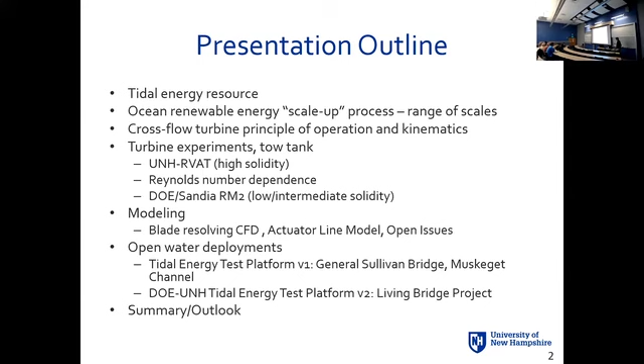At some point I may have to gloss over some things and move on, but overall my intent is to give you a good idea of the range of tidal energy research we have been doing over the past few years. So here's what I'll go through: I'll briefly talk about the overall tidal energy resource in the US, the scale-up process in ocean renewable energy development, cross-flow turbines, some tow tank experiments we've done right outside here, some modeling, and then mostly a picture show with data from our open water deployments. We have a couple of those.

Okay, so that's a complicated slide. I gave a presentation at Ocean Discovery Day - this is much better, I think. Shows a very big sun.

So wind energy is once-recycled solar energy. Wave energy is twice-recycled solar energy, and then tidal energy is two-thirds lunar and one-third solar energy. So tidal energy is actually a fairly small part, or could be at best a very small part, of our electric energy portfolio. Most of the resource is located in Alaska, actually, so that's not good for us at least. But we have some niche applications where this might work quite well - certain estuaries, inlets, and bridges. We'll explore those a bit more later.

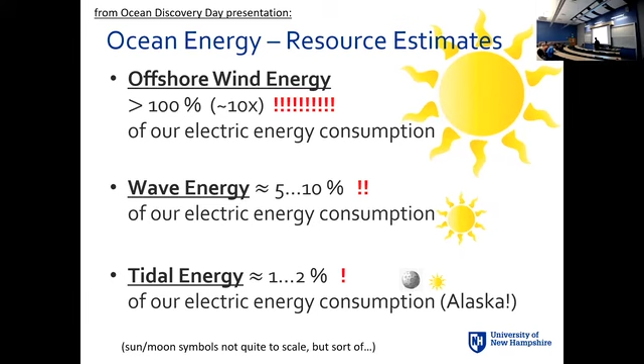So keep this in mind. That's really a massive part of the answer - that's a smaller part, wave energy, and that's very hard to do, we're still struggling with that. Tidal energy is a bit easier to do, a bit more obvious how it can be done, but it could at most be a very small part of the solution.

So in ocean renewable energy R&D, you work with theory, experiments, simulations, and then go through what we call a scale-up process. You start small, inexpensive, and then you grow it. You hope that before you move to the next technology readiness level, your answers from theory, models, and experiments somewhat agree, or that you understand why they don't agree before spending more money. At some point you have to go into open water, still a scale deployment typically. The first time you go into open water, you're still working at maybe a 1/10 to 1/3 scale, but that's how you work through this in order to not waste money.

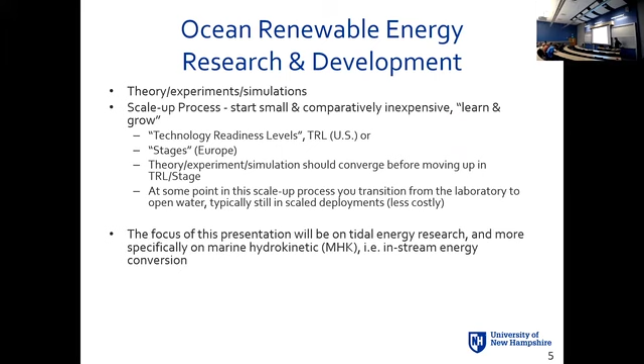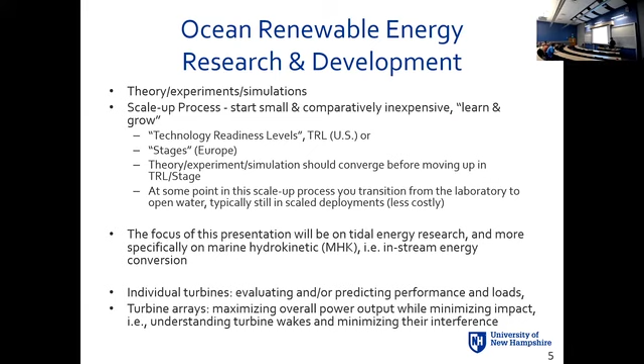So the focus of this presentation is on tidal energy, specifically in-stream hydrokinetic energy conversion, also referred to as marine hydrokinetic energy conversion, MHK. Here we're doing two things: looking at single turbines, mostly interested in performance, and looking ahead at array deployment - wakes and how these wakes decay and possibly interact. So performance and wakes are the two focus points of this study.

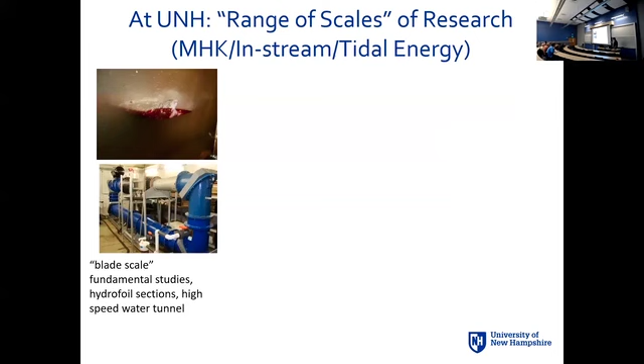Range of scales: we work from the blade scale, meaning we literally take little blade sections and evaluate lift, drag, cavitation characteristics in a small cavitation tunnel. Then we go to the tow tank, about a quarter meter or so, scale of a meter. Then we go into open water where we can work from say 1 meter to 4 meter. It's pretty crazy as a university to actually get into this 3-4 meter scale already - that's very large. Full scale, say a full scale 1 megawatt unit, might be as big as 16 to 20 meters, depending on the resource.

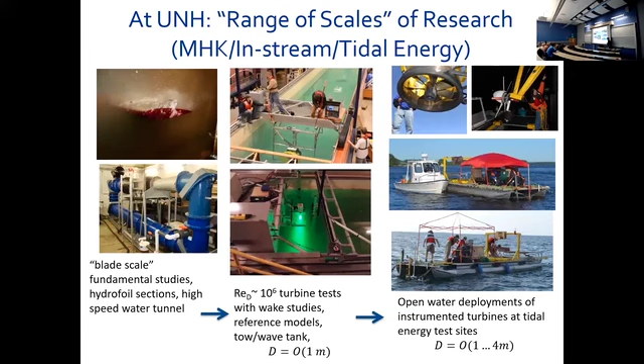They had to downrate it. This is when horizontal axis wind turbines were playing in the 500 kilowatt range, so these were much bigger at the time. They had to downrate the device because they didn't quite understand the unsteady loading that well. There were fatigue issues, and after 5 years it was shut down entirely. It's still standing, sort of a monument to the early successes and failures of these turbines.

There were fatigue issues. They were typically exaggerated with the power ratings. Actually, California made a mistake back in the early days of wind, paying developers based on rated capacity, not on energy delivered. So everybody was overrating their devices, and turbines had very low capacity factors.

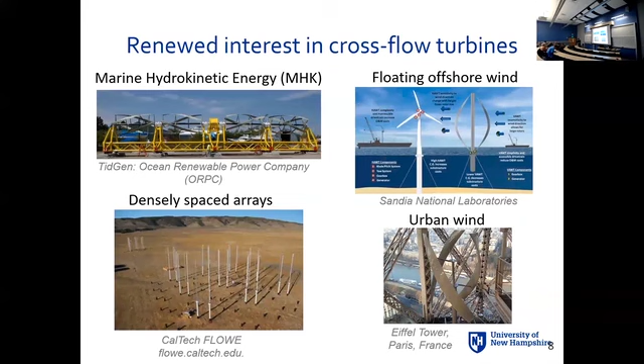So there's renewed interest in the marine environment, both for MHK applications and floating offshore wind, and then some other applications in terms of densely spaced arrays and urban wind. Cross-flow devices are quite promising in dense arrays because their wakes decay very quickly, and people don't really know why that is. They're also simpler machinery.

They're more complicated from a fluids perspective because they're unsteady devices - we'll talk about this in a moment. But they rotate in the same direction no matter where the flow is coming from, as long as that flow is approximately perpendicular to the axis of rotation. So you don't have to change things around. You put the thing in, it just runs.

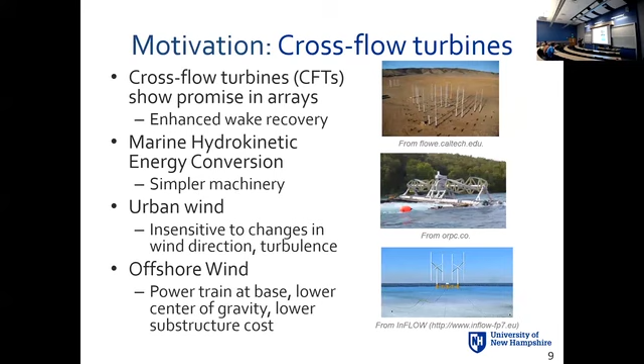And for offshore wind, you could possibly put the power train at the base of the device, which would make for much less need for balancing ballast below, compared to having a heavy power train on top of the nacelle. All right, so we have to have a little vector diagram.

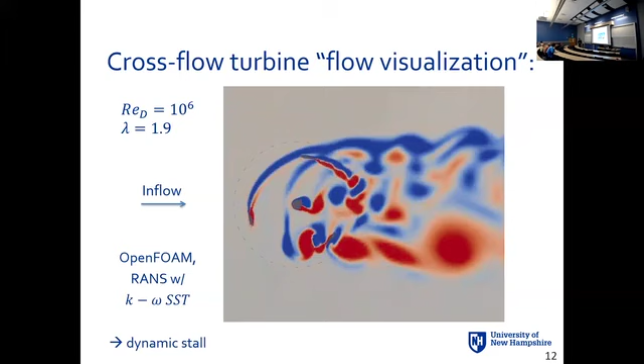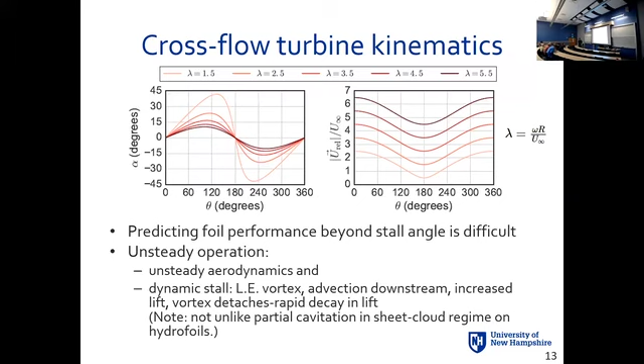You're dealing with unsteady hydro or aerodynamics, and there are a lot of similarities to rotorcraft flows. Some of the codes we use actually come from the rotorcraft industry. We have blades moving into the flow, blades moving out of the flow, that sort of thing.

So what do we have in terms of engineering tools? Well, we can do experiments, but if you go to large scale, experiments get very expensive. You don't want to play with large arrays and try to build like 10, 15 models at a large scale. We want to do this numerically.

For numerical tools, we have a range of models with increasing fidelity. We have very simple momentum or vortex line models, panel methods, then full Navier-Stokes simulations, either Reynolds averaged Navier-Stokes or large eddy simulations. And the actuator line model is sort of a method where you can reduce required resolution but still embed this into a full Navier-Stokes simulation.

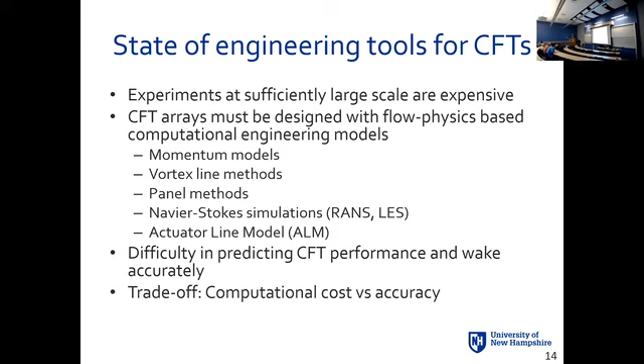There's been real difficulty predicting performance in a cost-effective way for these devices because they're unsteady. People have been struggling with this. The clear trade-off here is computational cost versus accuracy. We'll talk about the cost in a moment, how much time it actually takes to simulate these, and then how we can reduce them.

We want to understand performance better, improve performance modeling, and also understand wake recovery so we can put these in arrays. So what we've done is we've done experiments in the lab using the tow tank. You may have seen that turbine test bed standing on the side as you walk through the lab.

It's the funny hydrofoil frame with the black three-bladed turbine in it. We did some CFD to look at different classes of models. We did some blade resolved simulations and then developed this actuator line model compared to the blade resolved simulations.

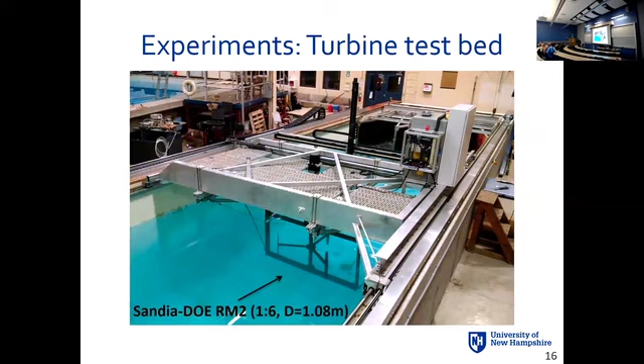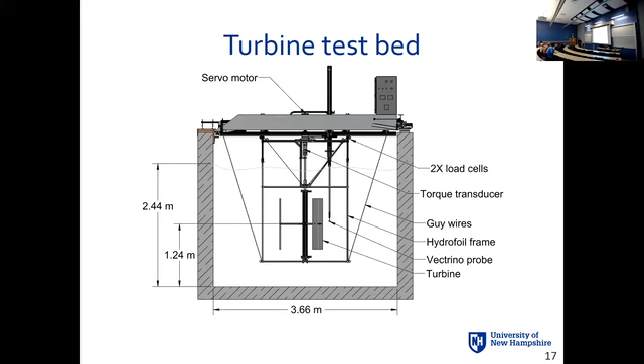We have load cells on this whole frame to get overall thrust on the system. We can tow it without a turbine to get a tare thrust and then subtract that to get turbine thrust. We can also do wake measurements with the Vectrino probe here, towing a separate carriage behind the main carriage. Here's a 4-prong lab version of a Vectrino that can measure 3 components of velocity at 200 hertz.

To get good signal to noise, we have to actually seed the towing tank with hollow glass spheres, which tend to clog up the filters. So, anyway.

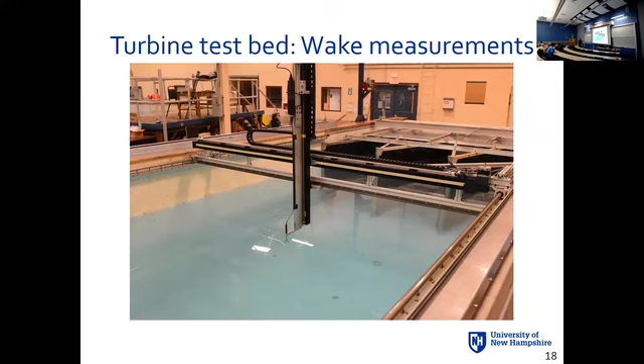A PhD student who was here until a couple of years ago, Pete Bachant, renovated the whole tow mechanism and this whole test bed, and he automated everything. Prior to this, we could do maybe tens of tows, and then we could literally do thousands of tows. Some of you may recall seeing Pete sitting there. It took him like a year to prepare an experiment, to get everything automated, but then he would just sit there for like 3 weeks doing nothing, just watching the thing go back and forth, watching his pre-made plots populate automatically, which is kind of a beauty to see.

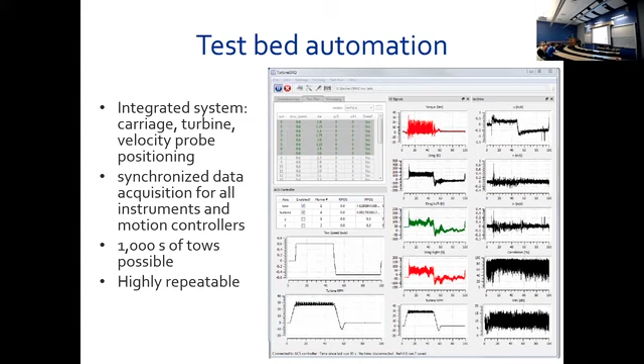So that's a typical towing profile. You can see the turbine RPM, torque, drag on both load cells, and then the different velocity measurements. That should play, yeah. So we actually spin the turbine.

The tank is really short. If I could change one thing about the tow tank, I would blow out the back of the building and make it like 5 times longer. But that's probably not going to happen.

So depending on the tow speed and tip speed ratio, we get about 10 to 20 steady state or quasi-steady state rotations over which we average. We do this over and over again, waiting a few minutes between each tow for the tank to settle down, and so forth.

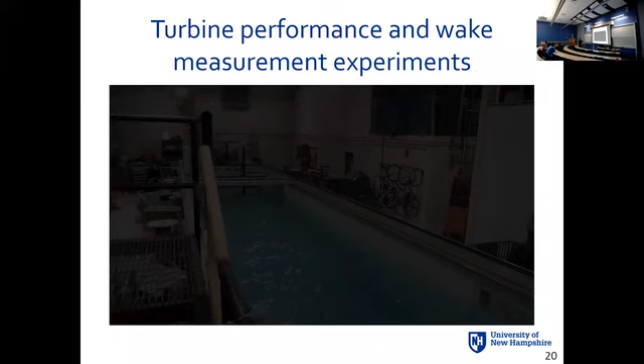So we want to talk about only 2 turbines. We tested a number of them, but these are the two we have most of the data for. It's what we call the UNH reference vertical axis turbine, a high solidity turbine which we built from these NACA 0020 hydrofoils that we had. They're pretty, not cheap to make. We had a whole bunch given to us by a company who went out of business doing this kind of work, so I'm quite happy to have lots of these laying around. It's a meter by meter.

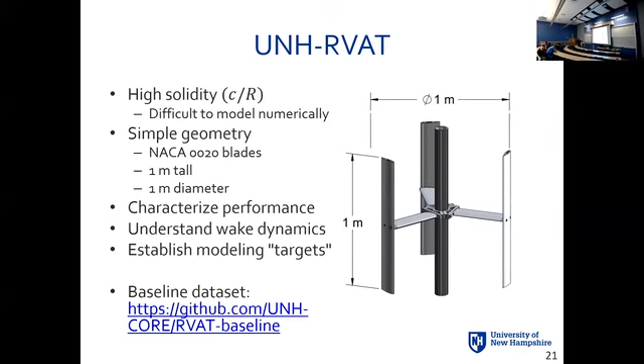It's a reference model. Here's what these typical power and thrust curves look like. This is a power curve, non-dimensional power versus non-dimensional rate of rotation, or power coefficient versus tip speed ratio. You basically measure the mechanical power on the shaft, then divide by the power available in the flow you intercept. That's how you calculate this. Same thing for the drag or thrust coefficient.

You can see the drag and thrust goes up monotonically, so if the turbine rotates really fast, it looks almost like a solid object to the flow. But there's a clear peak in power, at a peak tip speed ratio of about 1.8 to 1.9. But this turbine operates best around 0.25 or 0.26, which is fairly low. This turbine was not designed for maximum power, it was designed to be a simple reference model. Big horizontal axis wind turbines may reach as high as 0.5.

And we have another turbine, which I'll show in a moment, which also went a bit higher. We did some wake measurements - this is a full grid of 270 points, or 270 tows.

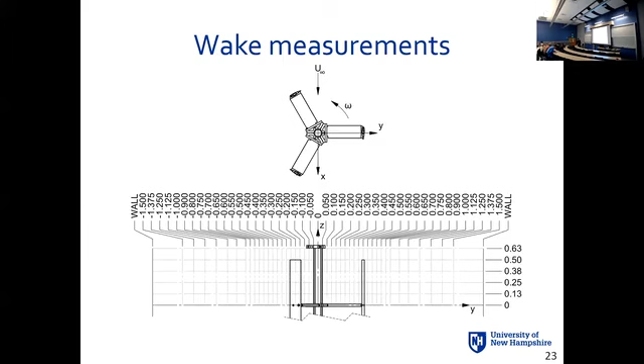Look at the wake structures - this is what the wake looks like. Mean velocity deficit on top, turbulent kinetic energy on the bottom. You can see where the kinetic energy is strongest, and you also see this strong mean advection coming down. That really hadn't been seen before like that.

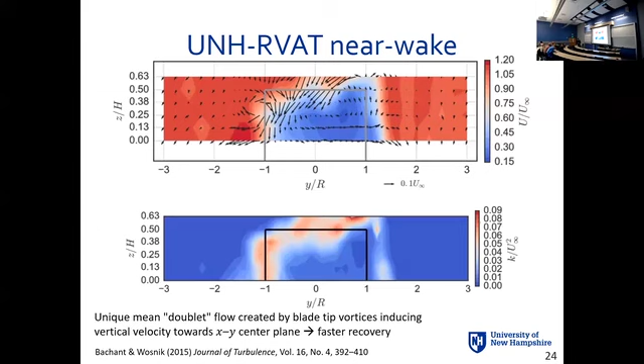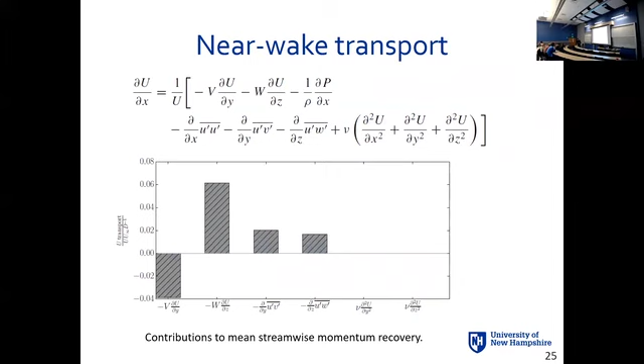We looked at a couple of equations here, went through the governing equations term by term and tried to figure out which ones drive this. In the mean momentum equation, the vertical advection is the strongest - the viscous terms are so small you don't even see them. In the turbulent kinetic energy equation, again the advection of kinetic energy is the strongest aside from production, and dissipation is also really, really small.

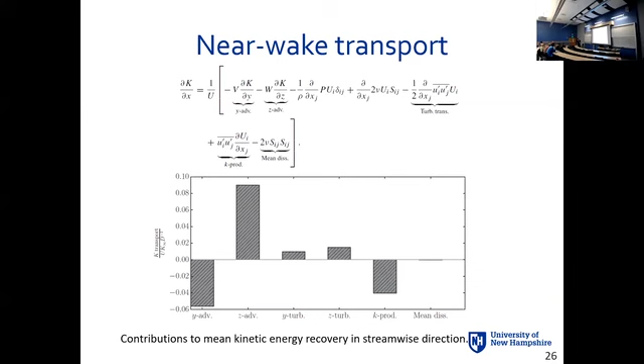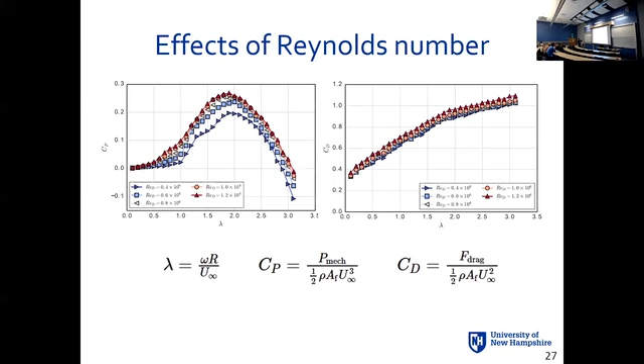That was an important insight, and that actually got us some work. In a moment, I'll explain what kind of work that got us some years later.

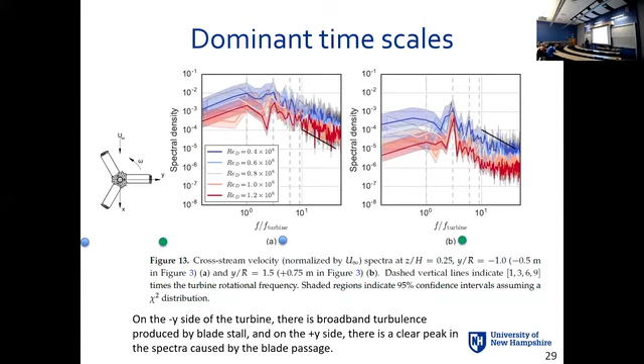Dominant timescales - if you think back to the 2D visualization, you see that on one side you have these blades passing and flow not really separating, over here on this part. So you see dominant timescales that are multiples of the blade passage frequency - you can clearly pick those up. Whereas over here, where you have the dynamic stall vortex coming down and really broadly mixing out, you just see this broadband turbulence in the spectrum.

We did another experiment for the Department of Energy, called the Reference Model 2, designed by NREL and Sandia - National Renewable Energy Laboratory and Sandia National Labs. I wrote a proposal for that like 4 years earlier. They have this dual rotor configuration, and I proposed it with just a single rotor, because the dual would make it too small and you can't really figure anything out. They picked another lab to do the work with a dual rotor - University of Minnesota, where I previously worked for a couple of years.

So it hurt to see the work go there. But then they couldn't really figure out what was going on. The models were so small that it also really matters how you mount the blades - they had the blade chord mounted just a fraction off, which reduced performance. The dual rotor - the left rotor had 5% efficiency, the other one 8%. So, what is going on?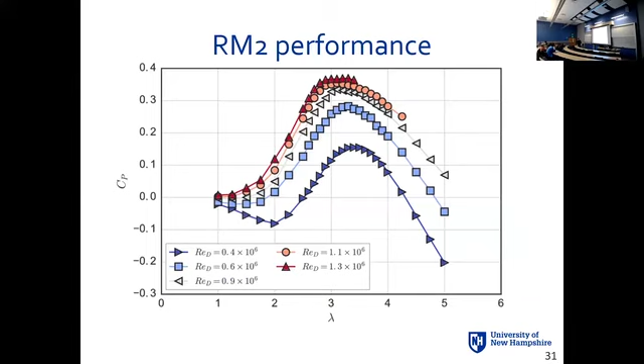You may notice we're missing the higher rotation speed data up here. Things were getting a bit hairy in the tow tank with this thing flying through and rotating, and it's a big complicated spring out there. Full disclosure, we broke the tow tank about 7 or 8 years ago, which was why we had to rebuild it because of this turbine business.

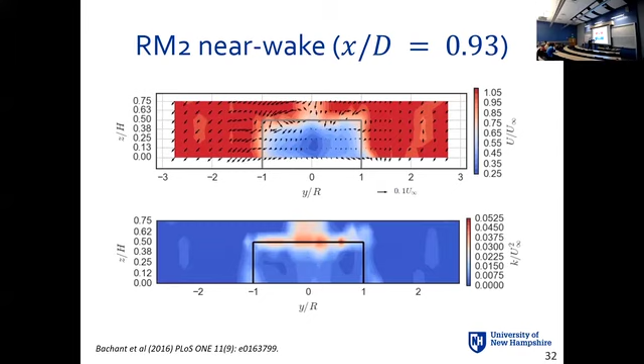All right, we see something fairly similar for the near wake, but this is a turbine that operates at a much higher tip speed ratio, so we don't see the dynamic stall as much.

So, all right, how am I doing for time here?

Okay, so we tested, did a quick test, what was the effect of struts. The struts for this turbine were also NACA 0021 profiles, and we made some struts that are really, really bad, which are just round pipes. If you know your fluid dynamics, round pipes have a really high drag coefficient, much higher than streamlined foils.

Here you can see the parasitic power coefficient, the negative power coefficient due to struts versus tip speed ratio. For the NACA 0021, we're losing, and this turbine peaked at about 3, so we're losing maybe 2 percentage points with these NACA struts.

If we mount cylinders, we lose a lot more. If you look at the power curves, we have the original power curve right here, and then we have an entirely negative power curve. So if you mount round struts, these blades don't provide enough torque to turn the thing at all anymore. That was sort of silly, but it provided a good reference case.

Since then, other labs have done studies with square, slightly rounded, and other struts, and used that same methodology to kind of sort out what works and what doesn't. Interestingly, the drag coefficient doesn't really change much. It's actually a bit less for the round struts, and that is probably related to not taking as much power out of the flow.

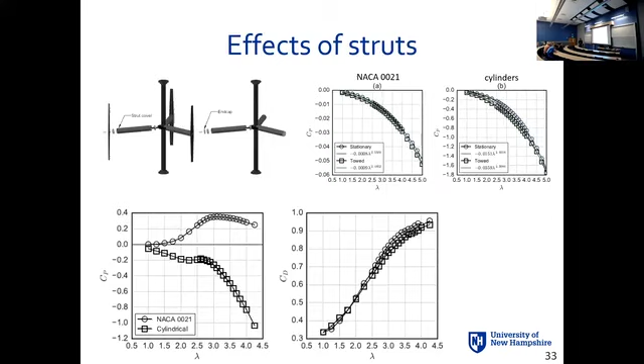All right, good, we're going to talk about modeling real quick. Just a few slides: blade resolving CFD, then the actuator line model, and I think I have one slide on this Sandia vortex wake model. And then, yeah, open issues - we never quite wrapped that up.

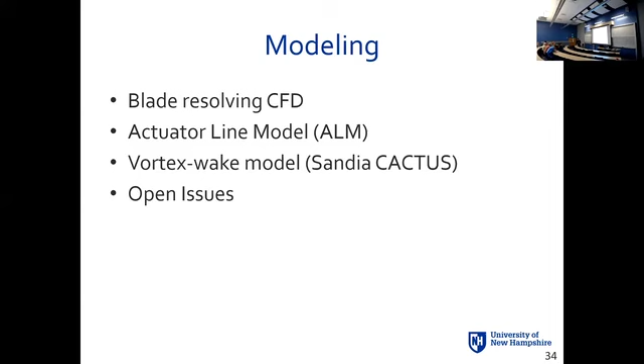So if you do a fully blade resolving simulation, you have to refine your grid more and more the closer you get to the blade. You have to basically refine your viscous lengths on the blade. The viscous length scale relates to what happens in the boundary layer. The very near wall region out to viscous lengths of maybe 3 has a linear relationship between velocity and distance from the wall. Then it gets more complicated.

Unless you get inside of a y plus - the viscous length has units of y plus, which is wall distance over viscous length, which is kinematic viscosity over friction velocity, which is a whole other thing I'm not going to get into - but you need to get really, really close to the wall, within one viscous length, to resolve that sublayer and get good results. So your grid requirements are very large - you need massive grids. And that requires lots of computational time.

So to simulate the UNH reference vertical axis turbine with a typical 1 or 2 equation turbulence model, we tried both the Spalart-Allmaras, which is the 1 equation model, and the K-omega SST. It requires on the order of 10,000 CPU hours for 10 seconds of operating time - that's 1,000 CPU hours for 1 second of operating. So that's not cheap if you do that.

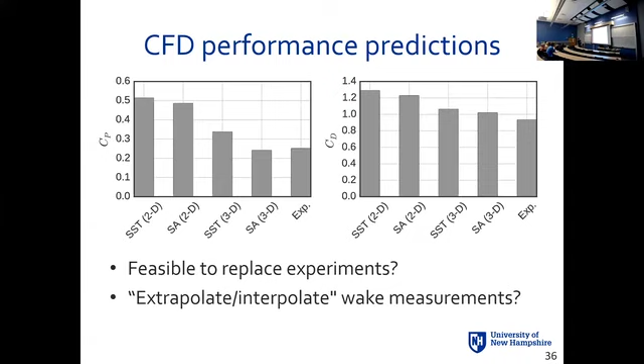Here's an overview - it's a simple graph, but it shows quite a bit. We have 2D simulations with the 2 equation model and 1 equation model, 3D simulations with K-omega SST and Spalart-Allmaras, and then the experiments. You can see that the 2D simulations greatly overpredict everything, which is to be expected because you have this added blockage in 2D. We're still off by about -10 or +15% in performance here, so it's okay, but not great. And over here is thrust, where they all do pretty well, actually.

All right, so here's another way to approach this without having to fully resolve everything on the blade. This is called an actuator line model. It was developed for wind turbines by a Danish group. You basically solve the Navier-Stokes equations and add a forcing term for the effect of blades. You don't resolve the blades, you put forcing terms in where you want the blade to be. Then it's about how to model this forcing term and how to smooth or spread it out.

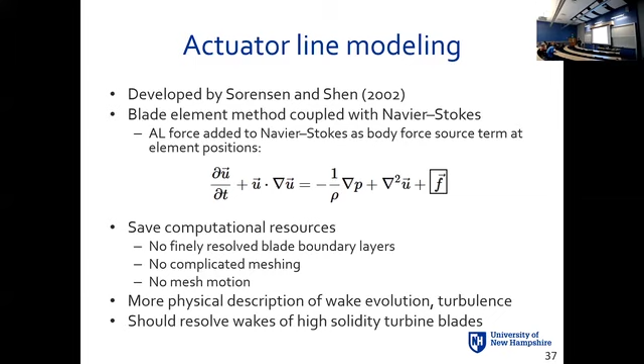So you don't need to resolve the boundary layers. Meshing is very simple, and you can still implement this into high resolution simulations, okay?

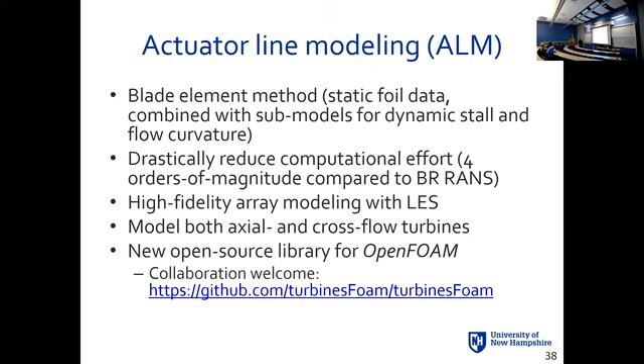Ultimately, our goal was to implement this in a large eddy simulation, which is a high fidelity simulation, really a direct numerical simulation above some subgrid cutoff scale, below which you model the effects of dissipation. So you get the large scales right, and you don't resolve the small scales, but you model their effects. The filter width is typically just the cube root of your mesh volume, so that's an easy way to cut this off.

So here are our first results. Remember how one data point took 10,000 CPU hours? Now we're able to do this entire curve in less than an hour. We were like, yay, this is great, it's working.

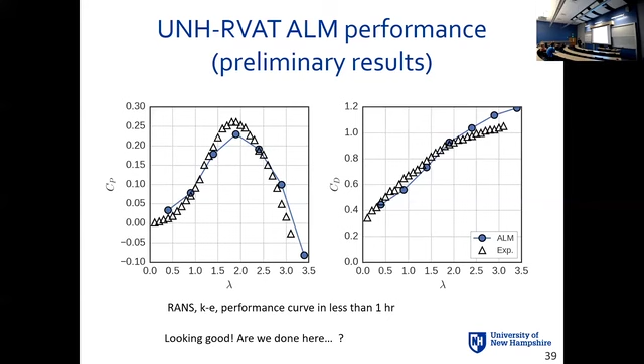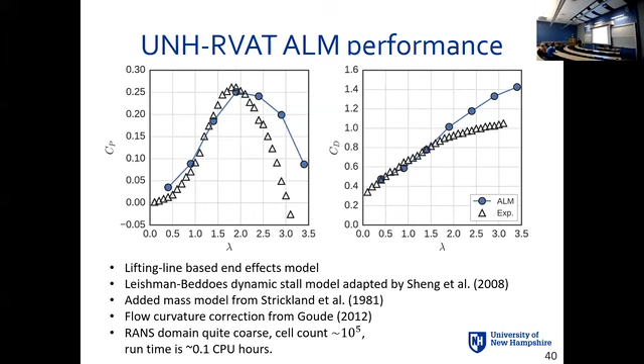But we hadn't really tweaked all the parameters yet in the most physical way, so we weren't quite done. Once we added all the effects that should be in there—some end effects model, an improved dynamic stall model, added mass, flow curvature correction, all this stuff—suddenly things shifted a bit. It's not as great anymore, but we're still doing fairly well. It's not bad, there's clearly some room for refinement. I'll point out what these things are in a moment. But that's still running on the order of an hour for the whole curve, versus orders of magnitude more.

So then we looked at another model, something we did on the side. Sandia has a model called Cactus—it stands for something like axial and cross-flow turbine simulation. But all these models, including the actuator line model and this vortex model,

have to pull in foil coefficients for lift and drag, so you know what's happening at any given point. We had the hardest time making sense of all this, and we dug back into the literature. We discovered that the data set everybody was using had some things wrong with it, and it wasn't very trustworthy. They'd extrapolated from very few actual lab experiments to other foils and to higher Reynolds numbers, which was highly suspect. So we scratched our heads with this.

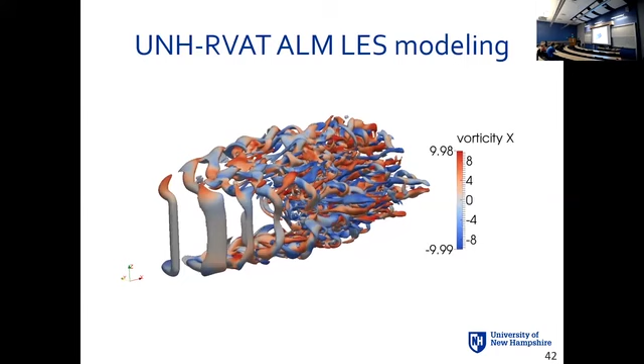Good, so there are some open issues. As with any simulation, the old joke is that nobody believes numerical data except the person who did the simulation, because there are many things you can tweak. So there are still things that need quite a bit of work: the Gaussian smearing parameter over what region you implement the actuator line forcing, getting the turbulence injection right, and some debate on how Reynolds number dependent that should be, and how to implement it.

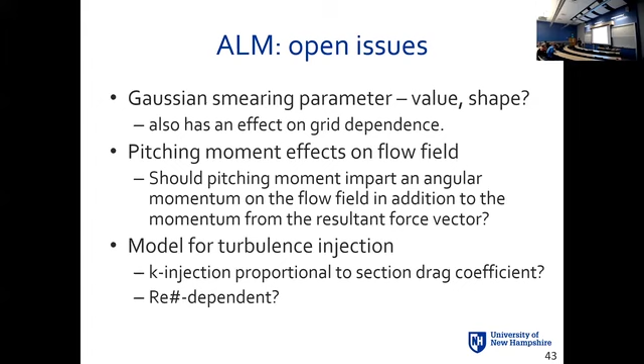All right, that's the overall result. We did these lab scale tests, and those are the blade-resolved 3D simulations—that's the time bar right here. If we can do it with an actuator line model with an LES, we have this time bar right here. There's a potential huge savings in additional time.

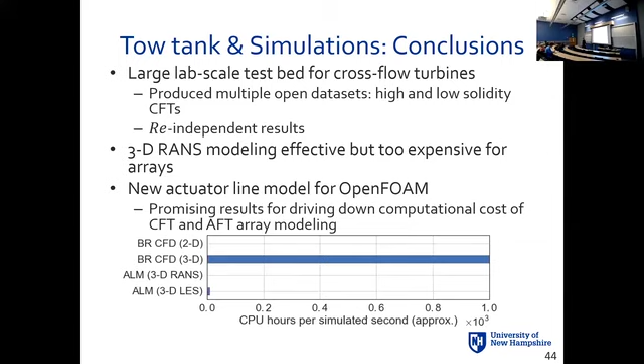All right, I'm going to switch gears and go mostly to the family photo album, picture show of what we've been up to in the last few months, actually a few years.

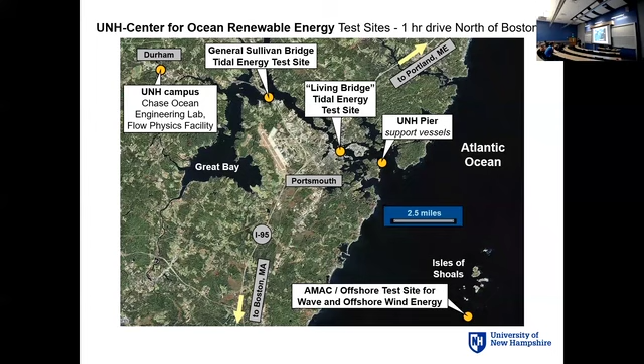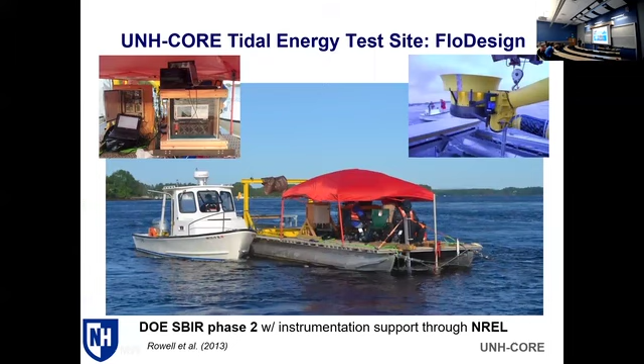This is how it started, back in February of 2009, with the first deployment of a Gorlov helical turbine. This came out of the Tech 797 senior project. This year's another senior project in 2011. Then we used this 35-foot kit pontoon boat, which Ken Baldwin bought at the time, for some DOE projects with more serious instrumentation for ducted axial turbines.

We classified our site as a nursery site up to a certain scale, and said we can have people go down to Muskeget Channel, which is between Martha's Vineyard and Nantucket Island, to test bigger devices. So we brought our platform down there just to try it out.

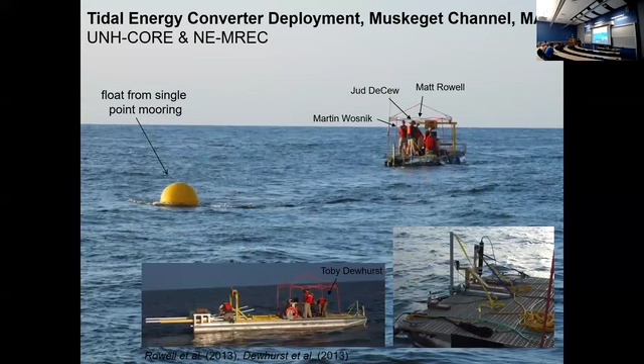You can see who was on the platform: Matt Rowell, who was actually the lead on these experiments, the grad student Jud, myself, and Toby.

Moving on to a more recent project, the Living Bridge project, a smart infrastructure project based at the Memorial Bridge in Portsmouth. The bridge was rebuilt in 2013 under emergency funding because it was found deficient. It was closed overnight to traffic, and it took about a year and a half to rebuild. They used some novel structural elements on the bridge called gussetless truss connections, made of rolled and bent steel. They did away with gusset plates, which are the ones that fail.

Look up gusset plates—it's a plate of steel with a thousand bolts on it, that sort of thing. This is a different bridge, but nobody had actually measured how these connections operate in the field; they were only models. So Erin Bell in civil engineering, who's the PI on this project, has instrumented this bridge with dozens of sensors.

Another neat thing about this bridge is it's a lift bridge, so every half hour in the summer you get a lift, which gives a nice impact load of maybe a million pounds. It's like banging the bridge with a giant hammer to get a dynamic response from it. So it's a great setup for this kind of smart infrastructure testing.

We said, why don't we, as an added wrinkle to make it more difficult for ourselves, try to power everything with tidal energy? That's where everything under the bridge comes into play—we have a platform there with sensors and whatnot. So 'living bridge' means the bridge is sensing itself. It talks to us via a website and a data acquisition system that reports out through a SCADA system, and it feeds itself with renewable energy. That's the whole living bridge model.

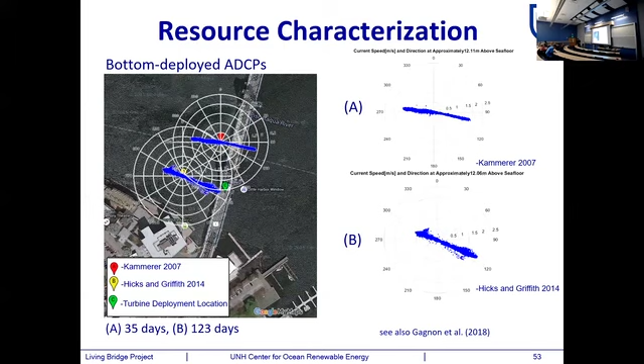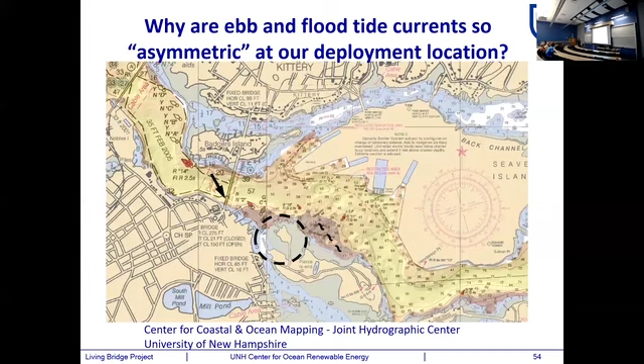So this is something we got from CCOM and JHC. It's an overlay of US sonar data on a typical NOAA chart, and you can see that these shallow regions are right here. There's Four Tree Island, but then this whole shallow region here, which is actually a mooring field for boats. So you can tell from there that on the flood, it'll shift the flow over to the Maine side, whereas on the ebb, we should be getting the strong flow head on.

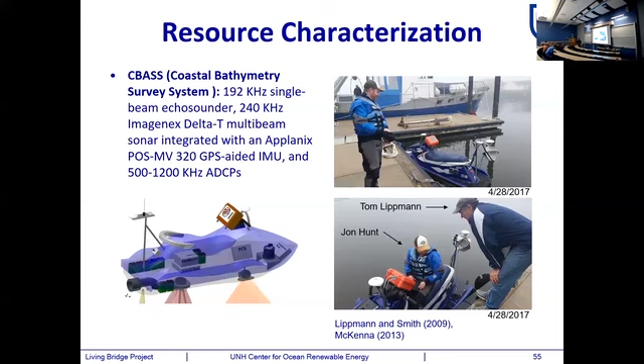So we involved Tom and Jon and their CBASS in the project. You all familiar with this? Basically, an instrumented jet ski that will give you— it's all in the processing of everything, but Tom can process this to give you some nice transects, which we have right here.

So these are transects near the max spring ebb and max spring flood tide, and these are averaged over 42 minutes, I think, going back and forth, multiple passes. And over here we have just the surface currents, not the depth, and you can see that on the flood, it's much stronger over here and not strong here.

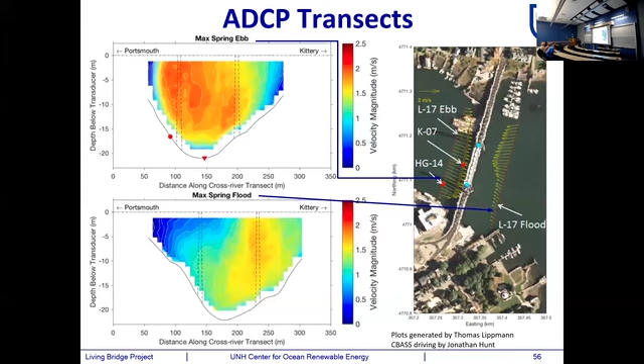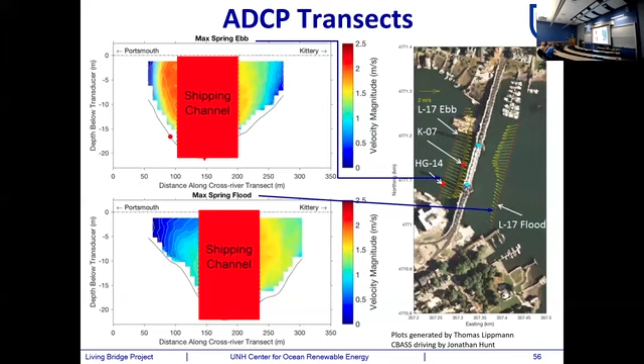So if we now block out the shipping channel where we can't go, which is between these bridge piers indicated by the vertical dashed lines, when there isn't much left where there is a good resource, clearly the spot right here is the one you want to be in. That would be on the Portsmouth facing side of pier number 2. So that's where we want to go with the turbine.

We designed and built this deployment platform, which consists of 42-inch diameter HDPE pontoons, essentially sewer pipe that is welded shut and foam filled. It has a steel superstructure, so we separated the function of providing buoyancy and providing structure. It rides quite loosely on these saddles here. And the whole thing can ride up and down on these vertical guideposts, and we can deploy a turbine through this moon pool rotating in and out.

Here's how this rides up and down. And the turbine spins because of the currents in the horizontal direction, not the up and down, but the currents going horizontally. And then this is how this rotates in and out. It changed a bit. You will see this in a moment.

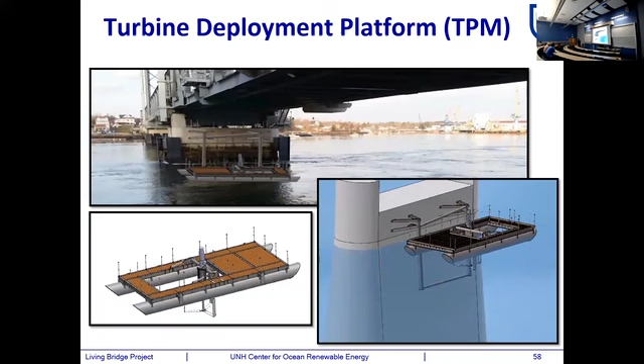This is a more recent, actually built version of this mechanism. We built a strong back, and we had to actually design some custom bearings ourselves and do this sort of as a one-off. And a winch is used to winch this in and out.

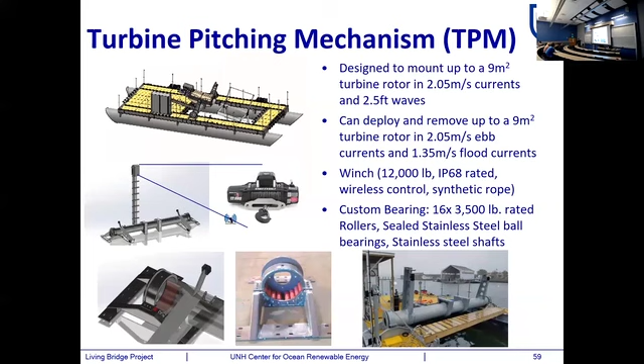Turbine selection, these are 2 vendors we worked with. The first one went bankrupt. Well, not officially bankrupt—they couldn't deliver the turbine. They had no money to finish it up. And we went with the bottom one.

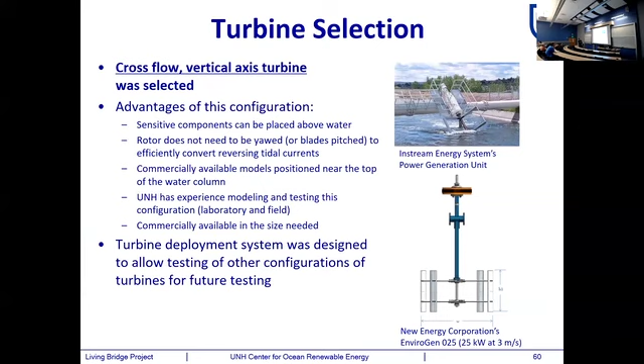This is a 25 kilowatt rotor at currents of 3 meters per second, so we're getting a little bit less than that. This is typically 3.4 meters in diameter. Ours is 3.2 because we had to modify it a bit to fit our system, which was designed for this turbine here originally.

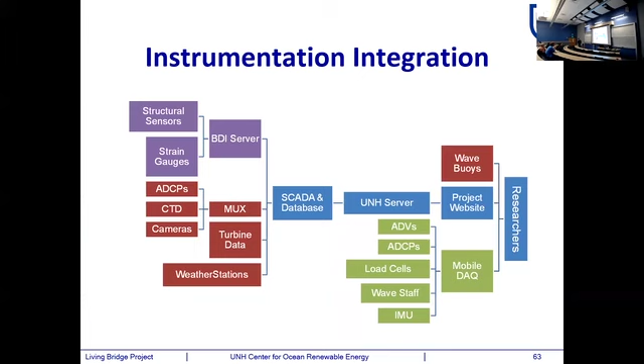Instrumentation, we have some baseline instruments—cameras, ADCPs, CTDs—and then we have a lot more instruments that we can add as needed. They're kind of set up in a couple of different systems, a mobile DAQ for all the extra instruments, and then the bridge instrumentation and platform instruments that go into a SCADA database. Kaylin is working on all that right now.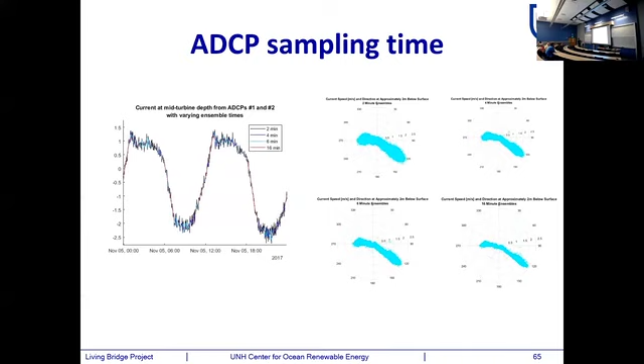And the Tidal Energy Resource Standards actually state these things too, that you should sample every 10 minutes or something. But if you do that, you really smooth out your signal, and you get much stronger currents on like a 5-minute, 2-minute scale or whatnot. And these tidal roses also change as you shorten your sample time—you increase your velocity by, in this case, easily 20%.

And your histogram kind of just shifts out towards higher velocities. I'll skip over that.

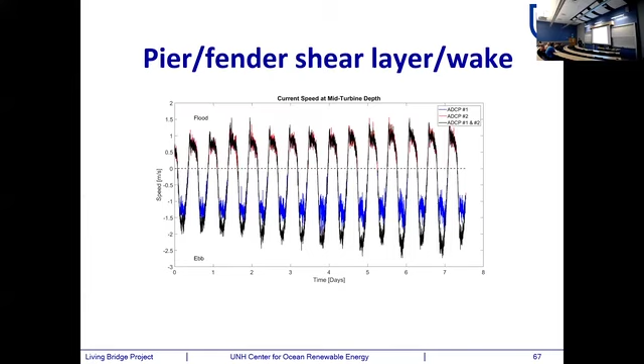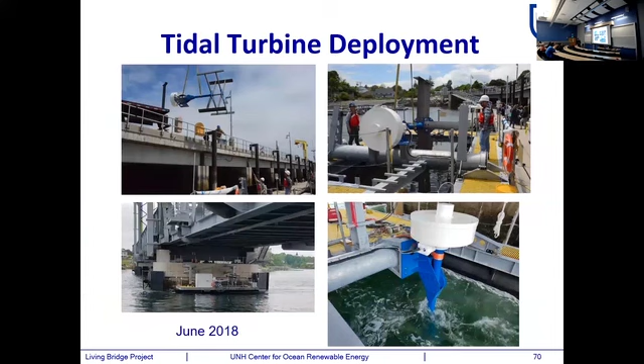Deployment timeline, you can see how the project was installed. Guidepost at the pier, the pontoons the first time floating out, and then the turbine assembly. This was in June of this year, and it was being craned onto the platform. Yep, right here, and then it went to the bridge, and here it is operating.

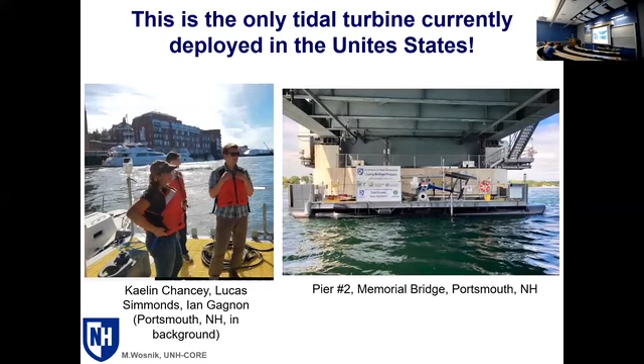There's Kaelin, Lucas, and Ian. Ian designed and built the platform and everything. Kaelin designed and is working with the instrumentation suite, and Lucas is an undergrad working with her. That's it. It's deployed at the location, and here you can see the turbine operating.

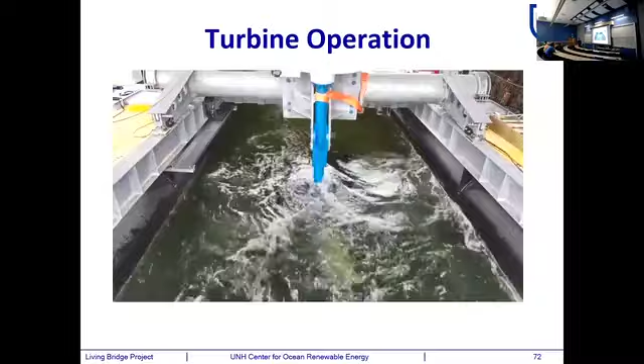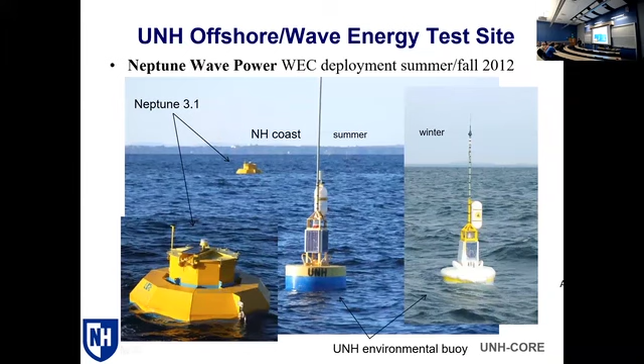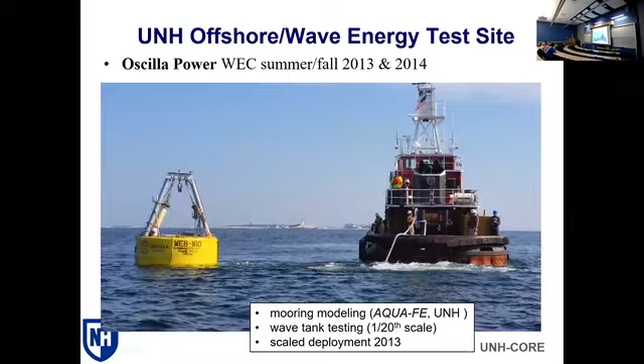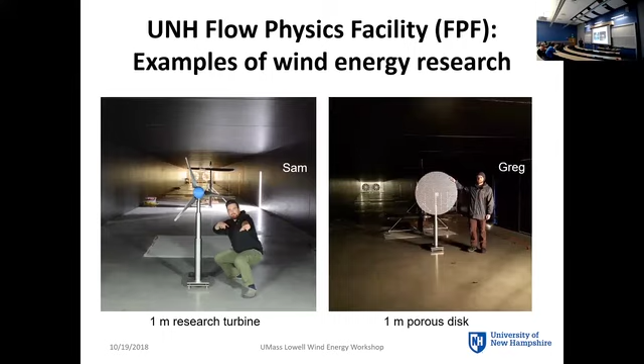And more recently, we looked at individual wakes, and if you're into similarity solutions and turbulent flows, we actually found that these turbines have an interesting wake behavior, and found some new scalings of those devices. And yeah, this is what most of the first part of the seminar was funded by.

This is the Living Bridge funding, 3 projects, which Aaron is the PI, and then this DOE funding as well. That's it. Thank you.

All right, it was a bit much, but I hope you get a good overview of everything we're doing in tides. Any comments or questions?

That's a difficult question to answer. At present, it is not, because they haven't provided us with a proper way to rectify the power yet. They have mostly deployed their systems in river flows, where they use a passive rectification system, which is designed for a certain fixed velocity, and that involves a very large capacitor bank. So we discovered in the design of this whole project that the capacitor bank would have to be huge for tidal flows to get a reasonable energy out. So at the moment there's nothing there, so we're getting decent power at certain speeds, but really poor power at other speeds. And we're waiting for them to deliver us an active rectification system, which is the proper way to handle this in tidal flows.

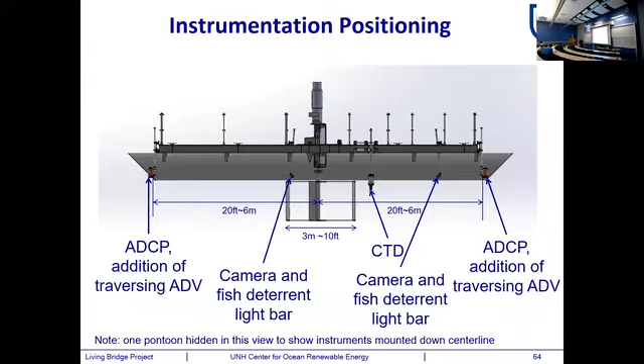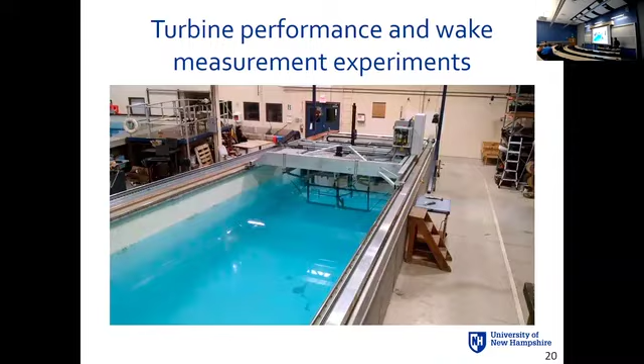So if you think about three-bladed wind turbines, axial turbines—a three-bladed axial flow turbine in a constant approach flow is a steady-state device. You have a certain design angle of attack on the blades, but each blade over its span sees the same flow no matter where it is in the rotation. If you put that horizontal axis wind turbine into an atmospheric boundary layer, things change—you have different loading during different parts of the rotation, and that becomes a fatigue issue as well.

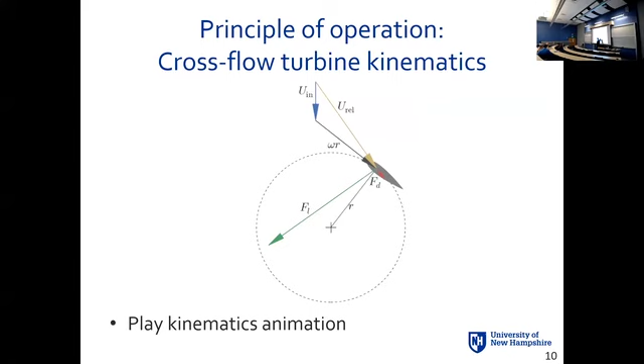But for these cross-flow devices, your flow is perpendicular to the axis of rotation—in this case, from top down. So this is what you were asking about, right? These devices are inherently unsteady because as they rotate—look at the yellow vector right here—that's the relative velocity at its effective angle of attack. So your relative velocity sort of oscillates around the leading edge of the blade, and that becomes a fatigue issue.

We've looked at how many cycles we get per year—it's high, in the tens of millions. So we need to design everything to be below fatigue limits, and if you look at fatigue design curves, that means you have to keep your stresses quite low in these devices.

It wouldn't—well, you could, but it wouldn't really change what you see. Somewhere you have to absorb this, right? Right now we're running with a direct drive generator, a low RPM generator. We could run with a gearbox and a high-speed generator, but it doesn't change things—you still have to absorb this torque somehow in the structure.